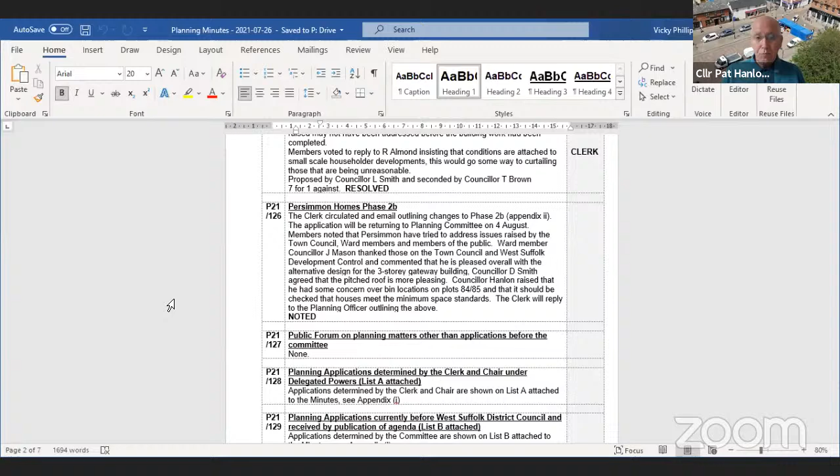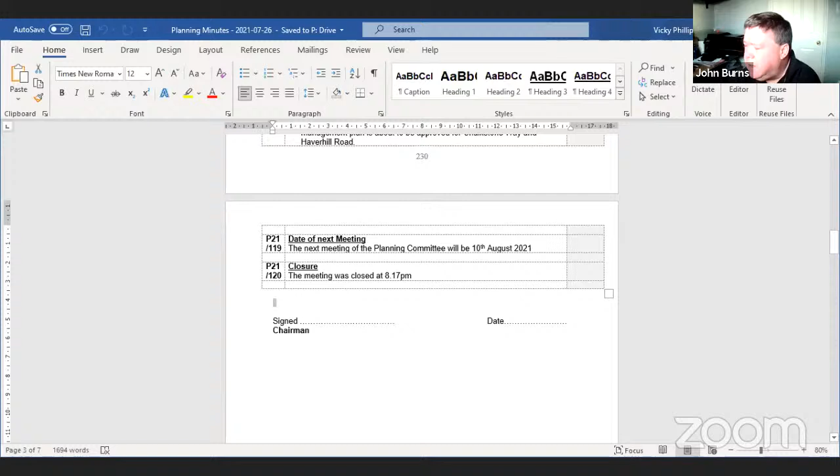Chair? Yes, Councillor Brown. I was trying to get your attention on the previous thing. The problem with the conditions came up again at development control last week, where I had to raise the subject twice for major developments where there were just no planning conditions listed, primarily because the officers stated, well, that's okay, they were in the outline planning permission. But of course, in one of the examples, the outline permission was something like 7 years ago.

So it's a classic example of needing to address this, whether it's a small development or the larger ones that we'll maybe be talking about a bit later on with Stuart McAdam and Persimmon and all this sort of stuff. The conditions should be there. Quite right. Thanks for that.

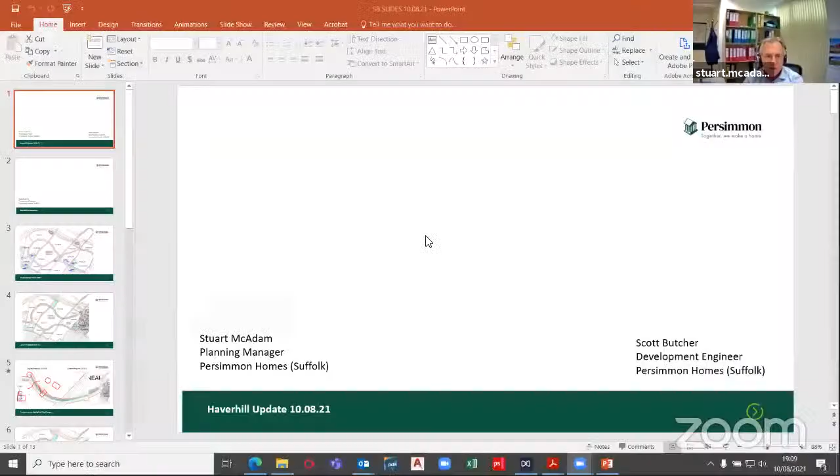So I've got with me tonight Scott Butcher. He's a development engineer. Scott has been heavily involved in formulating the revisions to the infrastructure application, and has worked closely with Penny Mills and internal and external colleagues over a long period of time now. The application, if you remember, was submitted originally in April last year. We've been through a series of changes, and that has resulted in the revised application, which is now in for consideration.

I would highlight that Dan White, who addressed you some weeks ago to talk about some of the applications at Haverhill, is no longer working with Persimmon, so I'll be picking up the pieces on this one now. Scott probably knows an awful lot more about the application than I do, and I'll let him talk you through the key changes that we've made to it.

We didn't want to bombard you with a whole lot of plans and information tonight. We want to comment and highlight the key points and key changes that relate to both these schemes. So the design access statement, you'll have seen by now.

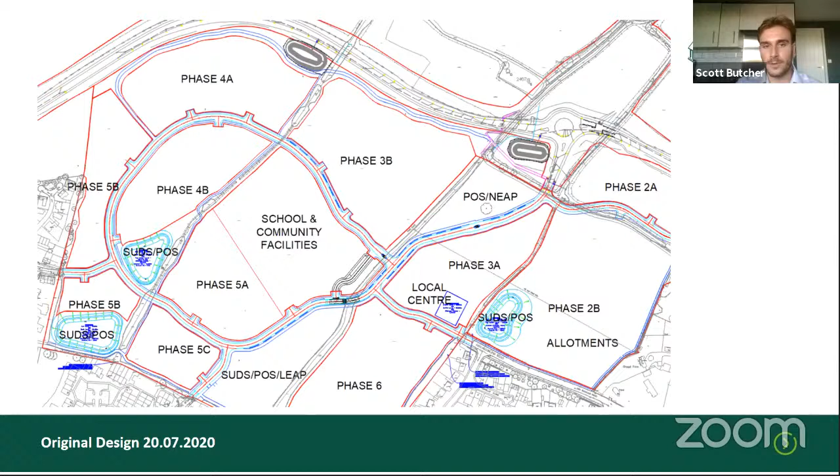So if I just take you back a year, this is roughly kind of what the infrastructure would have looked like. And I will now go to the current kind of proposal.

What I'll do is I've got them side by side, and I've marked up the more significant changes just to run through how we've got to the current proposal we have on the right. If you've got any questions as I'm going through, more than happy to answer them. If not, we'll go through that at the end. So I'm hoping these annotations work.

Looking at the left-hand side where I've marked it up, we had a series of staggered junctions. The first would have been an extension from Anne Suckling Road, and the other would have been by the local centre as you head south from the Relief Road. After discussions with Penny and Hen, they wanted to steer away from that because they were concerned it would just be used as a rat run. So essentially we've removed the staggered junctions and formed this kind of giant loop road.

There was quite a lot of concern with how we were going to puncture through the hedge. Ultimately, to be able to deliver this, we had to go through the existing hedgerow, so we ended up coming up with 4 different options for how we could do that. The first one, what we were trying to do was keep the alignment as close to the original, and then swoop down and come through the hedge perpendicularly, just to try and reduce the amount of hedge that would be coming out.

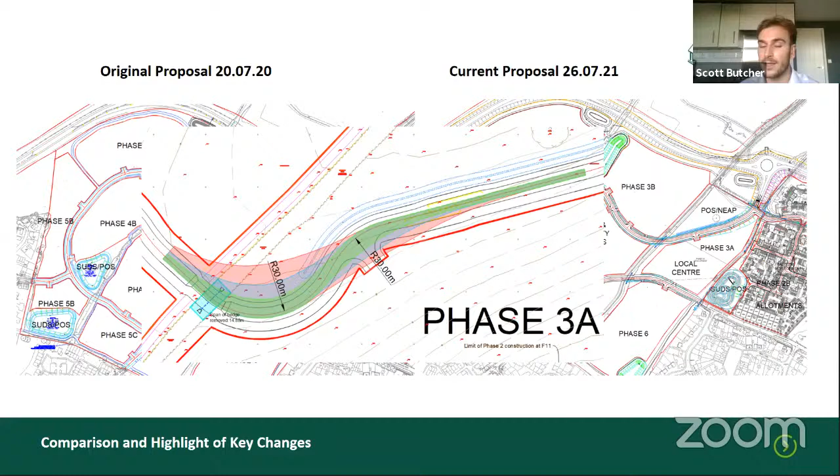When running the tracking for a bus getting around there, because it's a bus route, you physically couldn't get the bus around. So that led us to our next proposal, which was this one. From a tracking point of view for getting a bus to go through there, it worked absolutely fine.

Because we're going through the hedge perpendicularly, we reduced the amount of hedge that would be coming out. But the issue we then had was you start eating into the amount of public open space we were going to be able to deliver, where based on the design code on the master plan, that's where the NEAP was going to be.

So from there, that evolved into our next one, which is similar to it, where we started to introduce this small pocket of open space down here, but ultimately it doesn't deliver what we wanted to do in the first instance.

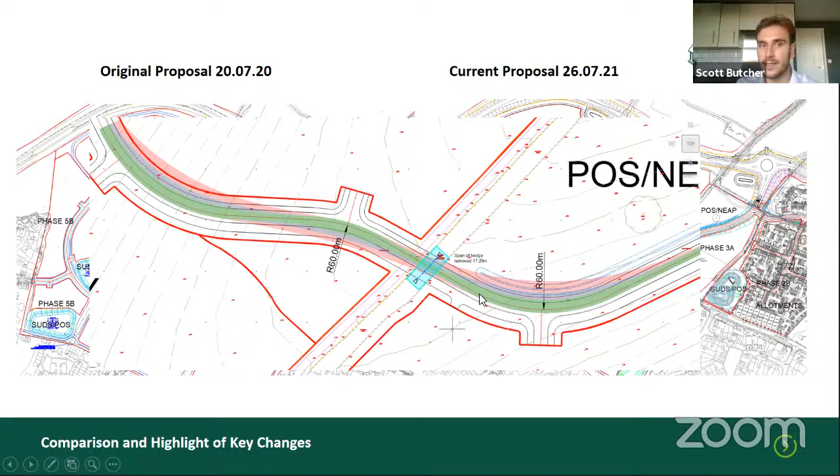So this is where we ended up with our 4th option, where we come through the hedge. It's not perpendicular to it, but by having this long radius coming through, we create a pinch point, so we narrow it down to single traffic. We're doing that to help as a speed calming measure, given it's going to be by the NEAP and the local centre.

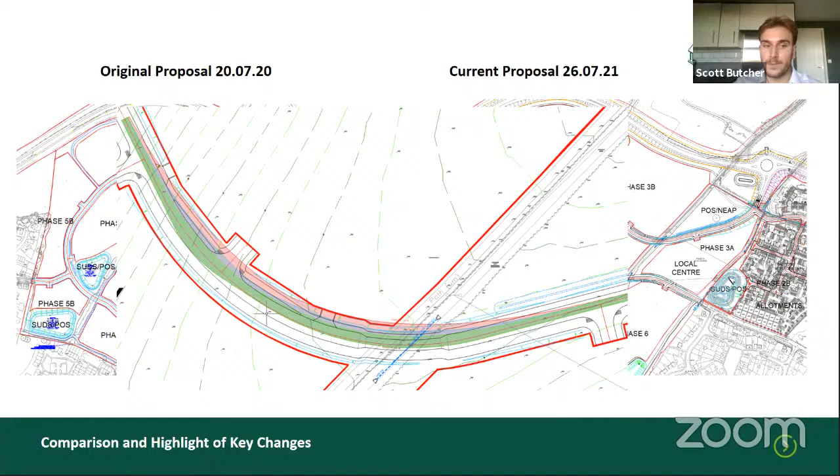So we've done all the tracking for it, it's absolutely fine. We've run the forward visibility, and based on where we've got to have the culverts to construct the road, everything's contained in there. We've reduced the amount of hedge that would need to come out to as minuscule as what we can. So that's the first point as to how we've got to where we have with the alignment of the road.

The next one we'll look at is to do with the drainage side of things. On the original proposal, there was an attenuation basin located just south of phase 4B.

After receiving some comments from the Suffolk Floods team, they weren't too happy about the fact that the drainage from phase 3B was going to have to go into a pipe system. It was going to cross an existing watercourse, and it was going to drain down through phase 4B to get to the basin, shown on the left-hand side of the screen.

So what we've done is we've repositioned the pond. All of the stormwater from phase 3B and some of the highway will drain into the attenuation basin, shown up here. It will then go into the watercourse. So 3B and part of the highway there is self-sufficient, and we're not taking any pipes across the existing watercourse.

The next one is the connection. Initially the road from Hales Barn Road was going to connect into the infrastructure. After having meetings with Hen and also with Penny, it was decided there was a concern that section of road could end up making the infrastructure a bit of a rat run again, so they wanted to deter people from taking a shortcut onto the infrastructure to get to the relief road or the local centre.

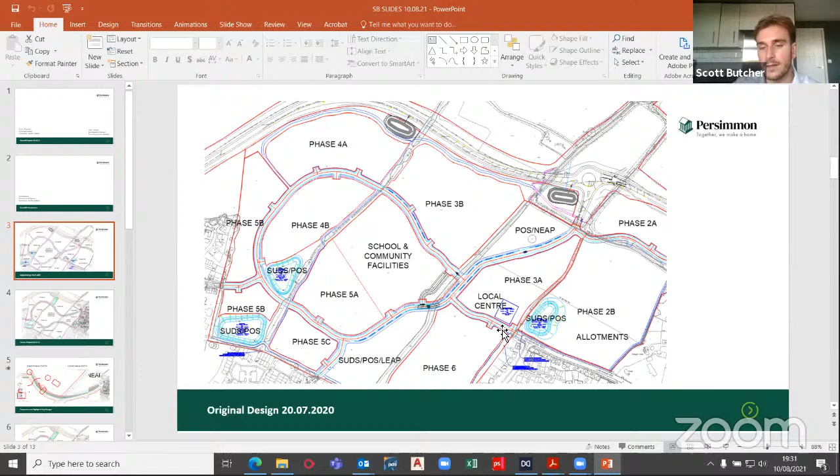So what we were looking to introduce was a raised table, and likewise there's another raised table along here. This is the original proposal, so there would have been an access into the local centre from the south. So what we've done to deter people from accessing the local centre from this side is changed.

We've removed any access from the southern side. This would just be to access the parcel, so any access into the local centre will be on the north. So if anyone did want to come through from the south, they've got to drive through the whole infrastructure to then get there. We've done it to try and deter them from doing that.

We've always been assured, even going back to the outline permission, which I've actually still got an audio recording of, that was always going to be either rising bollards or a bus gate or something. The whole purpose of having that road coming off the Relief Road at the top was purely so that traffic would come in that way only.

It's certainly something, John, we'll pick up with. Yeah, please, because we can't start changing—I know you've mentioned this before, so we need to. I know that Scott's been guided by what Highways and Penny have said, so we will check on that one just to make sure everything's correct. That's most definitely not for general traffic, just buses.

Because if they live on the south side, they're just not going to go around the relief road to get into the site. Okay, thank you, we note your point. We'll certainly make a comment on that. Okay, thank you, is there anyone else?

Councillor Crooks and then Councillor Dave Smith.

Yeah, I've got a different view to Councillor Burns. I personally think that Howe Road should be open to all traffic. I personally think Anne Suckling Road should be open to all traffic. I also think the link by Phase 5B should be a road connected to Hales Barn Road, so the whole estate is connected to Haverhill, is connected to our estates, instead of trying to make a leper estate where residents have to drive miles within their own town to get to the new houses. The whole estate should be connected to our existing estates. So it would absolutely be ridiculous if Anne Suckling became a bus gateway and Howe Road a bus gateway.

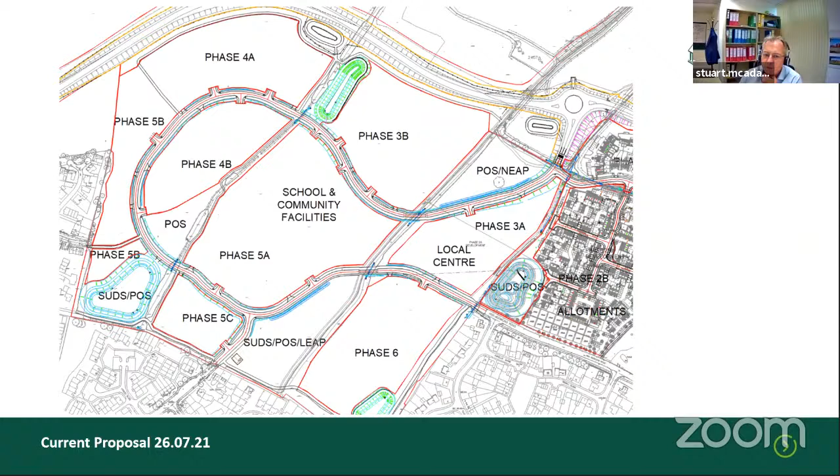Okay, right, do we want to go on to the open space if you've finished with the infrastructure, Scott? Oh okay, I didn't know there was more. Yeah, no, there's more - you've got me to contend with now. Sorry, let me skip through this. Mine's not quite so technical, Scott. You're sharing your screen, so if you can just lead through.

It's not as technical as Scott's was, but the very nature of Scott's dictated it had to be quite detailed. Mine is simply in terms of the sports pitches application. If you remember, we submitted this as part of the overall infrastructure when we submitted the application last year, and members of the town council and others were concerned about the open space provision coming forward in a timely manner. So we've split this out to ensure it can be delivered at an early stage.

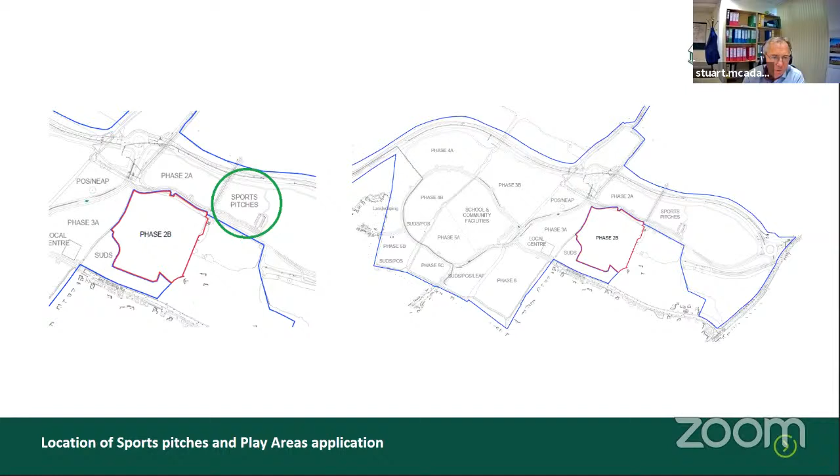The trigger for it is on 80% occupation, I think, of phases 1 and 2. So the slide in front of you shows the location within the overall scheme, and I've highlighted phase 2B there, and you can see the proximity of the sports pitches application to phase 2B. Scott, if you could just drop down to the next one.

This is just a reference to the approved master plan to show the green areas throughout the site. This was approved as part of the outline permission, and you can see that there's quite an extensive area of green space within the development.

The play provisions are spread throughout that and are also incorporated into the landscape plans for the infrastructure application, but this one centres on the area highlighted between phases 1 and 2 there as a sports area. So that's from the approved master plan.

So yes, Scott, if you could just bring up the next one. Again, the reference to the open space strategy is an extract from the approved design code, and the plan on the right shows the football pitches which were approved with the design code that accompanied the reserved matters application.

Next one, thank you. In terms of the detailed proposals for the sports pitches themselves, it's more than just sports pitches, and this is a plan which shows you what will be going into that area. Originally, we thought it was going to be an informal sports kickabout area where kids would go and put their bags down or coats and just have a kickabout, but officers of the council want something more formal than that.

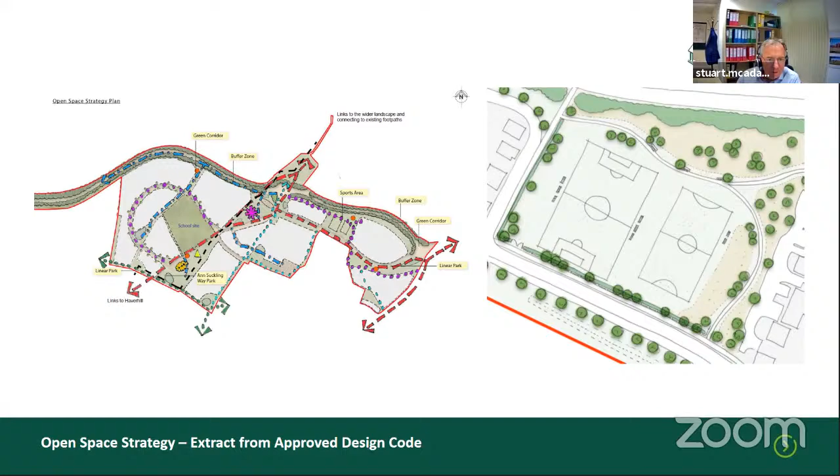Can we go back? There's plenty around the site, is there? If we maybe go back to - they're not highlighted in that one, but you can see the sports area there. This one here, you've got the sports area there, and the next one is the roundabout, the central roundabout, just where the cursor is now - that's going to be a NEAP in there, I think, Scott, is that right? Correct. And then further down, just where your cursor is, that's going to be where a further LEAP is located as well.

Okay, so are these green areas going to be there compared with the plans you were showing us earlier with the roads going around the estate? It wasn't obvious that those green areas were going to be remaining, but they're definitely going to be there, because the roads are a completely different design to what you've got on that original, approved master plan.

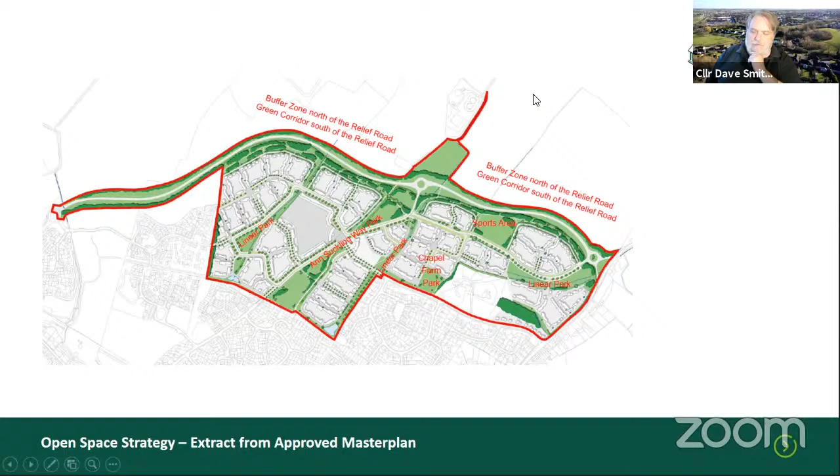So yeah, we've got the NEAP located up here, and then we've got the LEAP located at the bottom as well.

Are people going to walk from phase 4A down to that one you're highlighting there to go and play on the swings? I mean, it seems that you need more smaller ones around the development, rather than concentrating them all in 2 or 3 areas.

So previously, based on the old one, we had an attenuation basin there. Where that's now moved up to 3B, you've then gained that open space within this area. So there is scope where, instead of having everything within 3 key areas, there's no reason why you couldn't split it up to spread it around the development.

Okay, and final point - I suppose the design of the benches and the play equipment, is that going to be open to consultation? Because obviously we'd like something that's a bit more environmentally friendly than a lump of steel or something like that.

Yeah, that's something by all means you can make comment on. It's all part of the landscape proposals, so it's all contained within the pack as well. And more, we're finding that things are more environmentally friendly - there's construction out of timber and the like to encourage people to walk across the stepping logs, youngsters to do that. I don't know if you can bring up the illustration that's in there, Scott, in slide 11.

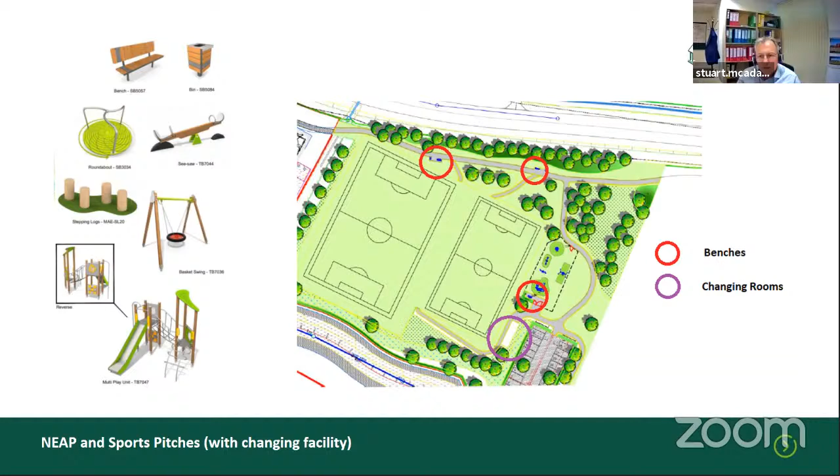That will be on the infrastructure plans, I think, Scott, won't it? Yeah, I think because I was conscious about the slope on there. I think it was shown. It's not on that.

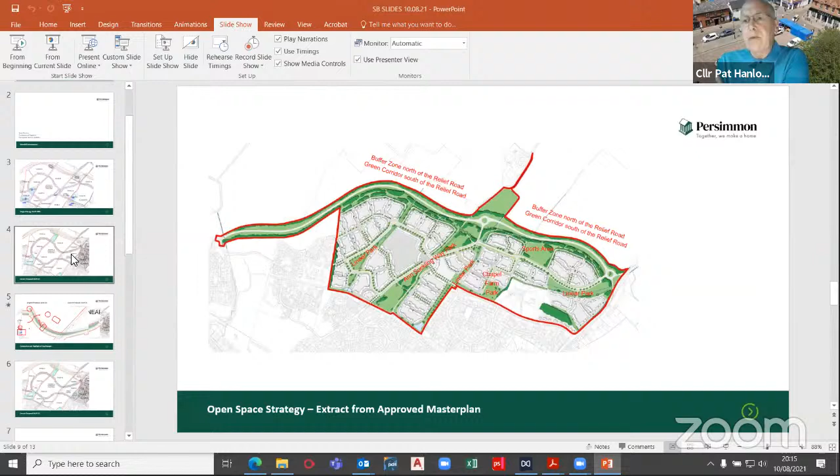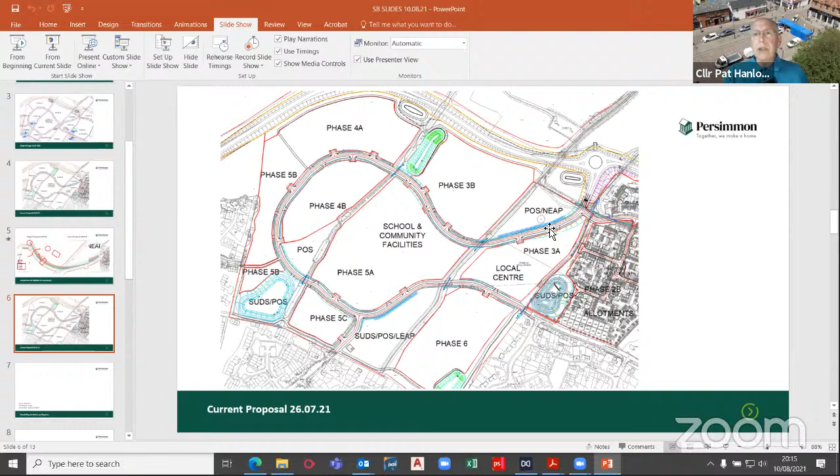Yeah, there is. Right, okay. Is there any other questions at all? No, can't see any.